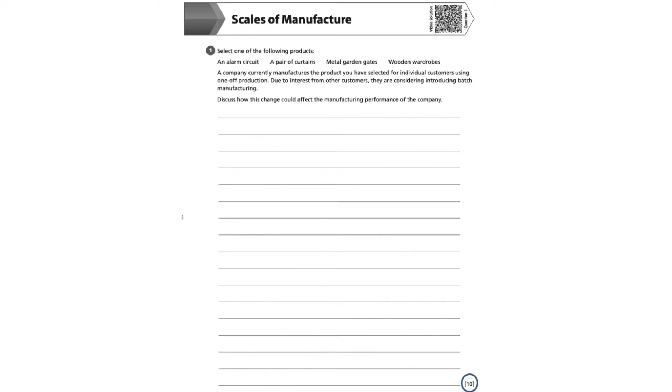We can see in the bottom right hand corner that this question is worth 10 marks in total. So it is definitely a question that we need to think about, as this is a substantial amount of marks. Let's start by considering the question in more detail. Firstly, we are asked to select one of the products. Now, it is really important here that you think about your specialist material area and that you choose the product that sits the best within this. Doing so will allow you to draw upon your subject-specific and technical knowledge.

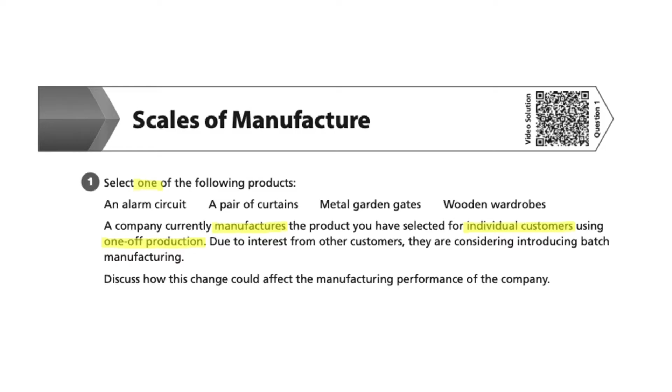The second keyword that I have highlighted is manufactures. Again, it is really important when we are answering this question that our focus is on the manufacturing processes rather than the design process. Individual customers is the next highlight that I have made. It is really important that we realise at the moment the company currently manufactures for individual customers, which is what we know is called one-off production. However, they are considering moving to the second highlighted word of batch manufacturing.

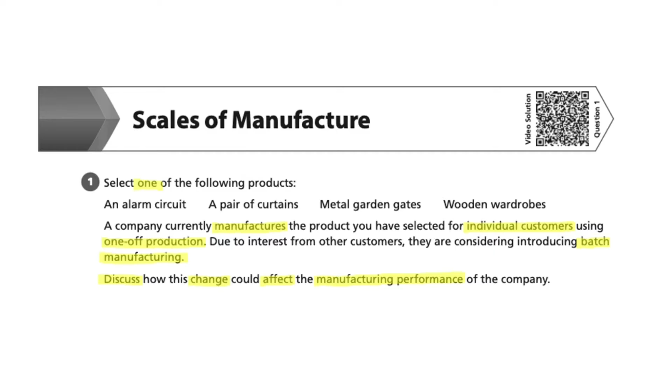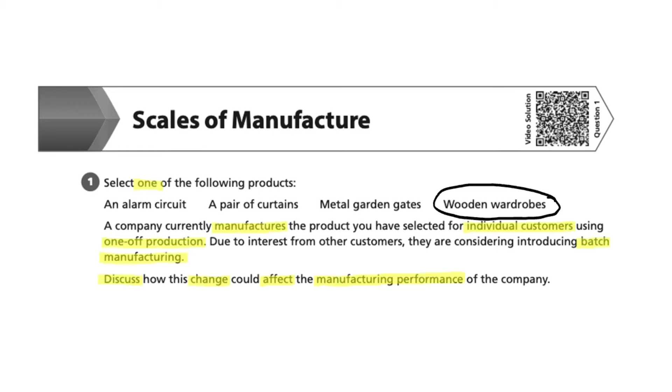Therefore, within this answer, you are asked to discuss the change from one-off to batch production, which will affect the manufacturing performance. Discuss is the command word here, which we must ensure our answer demonstrates. Discuss means that we should set out consideration to both sides, in this case, one-off production and batch manufacturing. For this example, I am going to choose wooden wardrobes as my product. However, the answer is very much the same regardless of the product in this question. This is because the question focuses on one-off and batch production rather than the making of the product itself.

To help me start planning my answer to this question, I'm going to jot down on the side of the paper some key words which I think I must mention within my answer. I know that changing the quantity of products can have a significant effect on many of the elements of manufacturing. For instance, materials. The materials used in one-off production are often of the best quality. However, in batch production, I may not be able to buy such a material in a large quantity. Therefore, I may have to change the material or components that I use for manufacturing. When I am making a larger quantity of a product, however, rather than just a one-off, this gives me the opportunity to bulk buy my materials and components, which will make the cost of the materials or components less per unit.

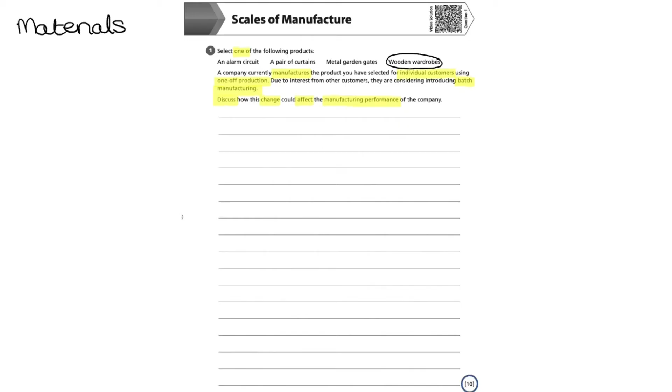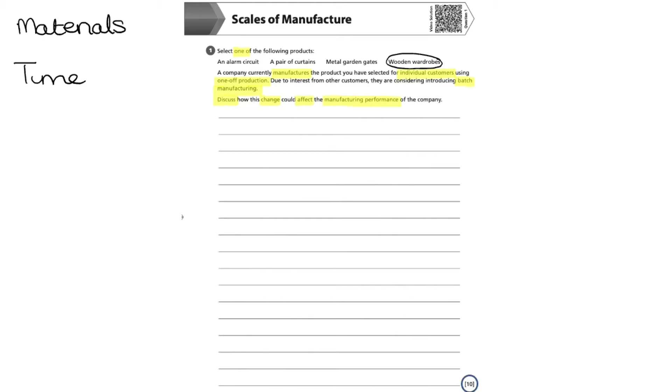The time it takes to make each product will also be decreased in batch production, as the processes of manufacturing are repetitive and the batch will be made in stages, meaning there is less time setting up tools and equipment. For example, all the hinges for the batch would be attached at the same time. This has a positive impact on the costing of each unit. Equally, as the workers will be able to repeat their tasks, they will become quicker and adopt a higher level of competence as they become more familiar with each task. Having said that, however, wages are often lower for workers within batch production, as they are repeating the same job, which means they have a lower skill set in general, which isn't as broad.

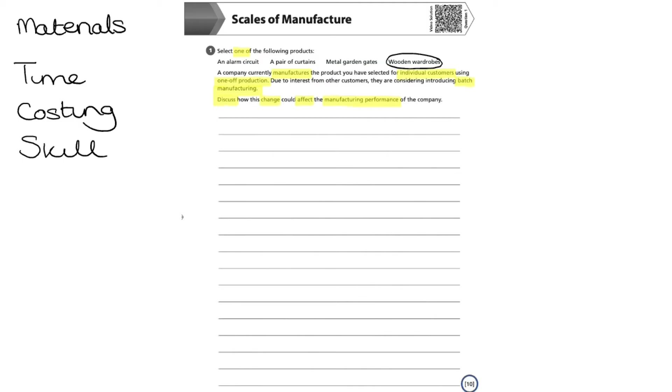One-off production often uses workers with a high level of skill to ensure that the individual product is of the very best quality. Experts in certain processes will be used, as each part of the manufacture needs to be right the very first time for this one-off product. There are no second chances. Mistakes can be costly, as it could mean that the manufacture of the entire product may need to begin again with one little mistake. Manufacturing in a one-off product is rarely automated, as the cost and setup of such equipment is so vast. It would increase the cost of the one-off product substantially. Whilst in batch production, the cost of setting up automated equipment can be shared between the number of units that are being manufactured.

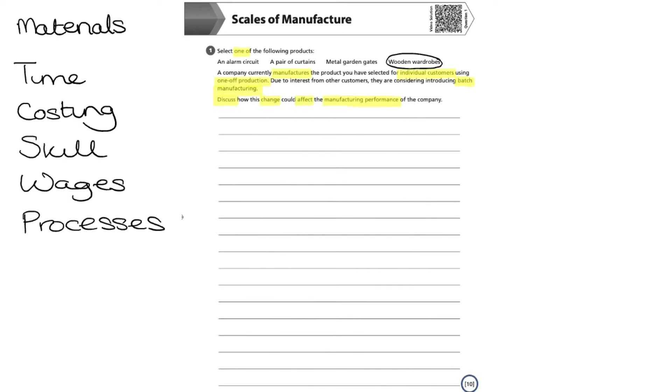Therefore, I have added processes to the list, as that is an important point to consider, as is automation. We could also discuss the differences between quality control. In one-off production, there are generally very high levels of quality control, and the product will be checked several times. In batch production, however, there are often only random checks on the products at certain points. Maybe it's every 1 in 10 products, or 1 in 50, 1 in 100, or maybe even 1 in 1,000, depending on the size of the batch. This assumes that all of the other products will be of the same quality due to the repetitive nature of the manufacturing process. This means that inspection costs are lower. However, in batch production, some products may slip through which are not of the quality one would expect.

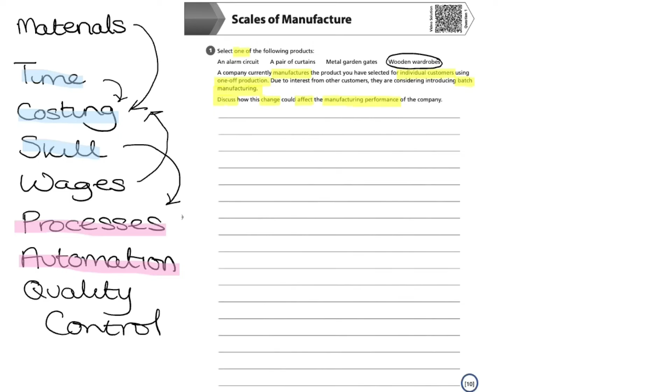Now that I have brainstormed the scales of manufacture, I can begin to link some of my notes together to help me in structuring my answer. I could do this in many ways. I could use colour coding, such as the blue here that links time, costing and skill, or the pink which links processes and automation. Or maybe I could use arrows to link different ideas together. Numbering is another method which is often used. I tend to begin writing my answer, however, and then use my brainstorm as a checklist to ensure that I have included the points that I wish to.

Here I am going to begin an introduction to introduce what batch manufacturing and one-off production actually are. Now that I have introduced batch manufacturing and one-off production, I'm going to start choosing one of the considerations I brainstormed within my notes. I think I will use costing to start with.

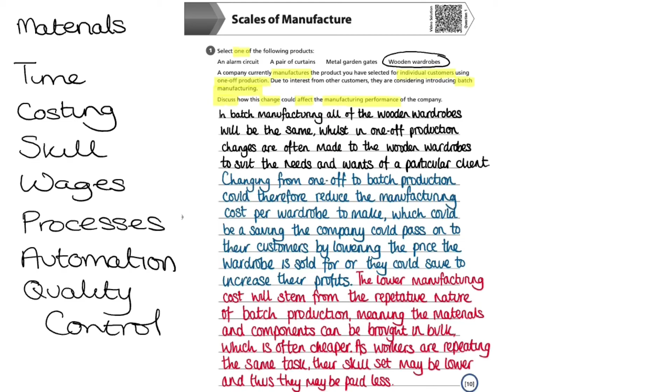As our command word is to discuss, I am making sure that when I write my answer, I am doing so by considering the effects of cost on both one-off production and batch manufacturing. This in turn links to materials and the skill set of the workers. As I have now got to the end of the space for our answer to be written in, I am going to read back through my answer. And as I do, I'm going to tick off where I think I may have achieved a mark.

In batch manufacturing, all of the wooden wardrobes will be the same, whilst in one-off production, changes are often made to the wooden wardrobes to suit the needs and wants of a particular client. Now, although I think that I have achieved a mark there for saying the difference between batch manufacturing and one-off production, I feel that I could have done some editing.

I feel that where it says in batch manufacturing at the beginning, I should have written also a specified number of identical products are made, meaning all of the wooden wardrobes will be the same. Whilst in one-off production, and here I think I should have inserted one product is made at a time for a specific customer. Changes are often made to the wooden wardrobes to suit the needs and wants of a particular client. That to me is a much better introduction.

So don't be afraid to edit as I have done, but just make sure that it is very clear to the examiner anything that you add. So here I've used a little star to mark that, and then I've also tagged the second bit onto the second line. The addition of this detail and clarification would have helped me to gain a second mark here.

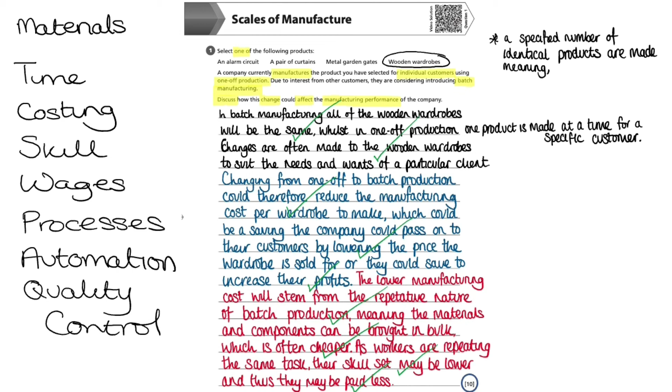So at the moment, we can see that our answer probably only has 9 marks. However, we really need to achieve 10. So we're not going to just leave this answer. Instead, we're going to look down our brainstorm, which we did earlier, and see if we can draw out another point or so to ensure that we do achieve full marks for this question.

When we go through our brainstorm from earlier, we can see that we haven't really talked yet about the time difference between one-off production and batch manufacturing, automation and quality control. So I think that is what I will add on to my next part of the answer. There is often additional paper on an exam for you to add to your answers for the longer questions. However, if not, I am sure you will be able to find some space to add what you need to write. Again, just make sure it is very clear for the examiner to see.

So I've now added on, dedicated jigs and automation may be invested in for batch production. That's the next mark that I needed, but I'm going to expand on it further just to make sure that I do get the 10 full marks. I then go on to say the cost can equally be divided per wardrobe that will be made within the batch. Another mark. The use of jigs and automation should speed up the time of manufacture for each wardrobe, meaning more can be made than in a one-off.

The addition of this information has definitely ensured that we have given enough information within our answer to achieve the 10 marks available for this question. Your answer may have included other points also. For example, I could have chosen to expand my answer by writing about quality control, which would have led on well from my discussions about the workers, processes or automation.

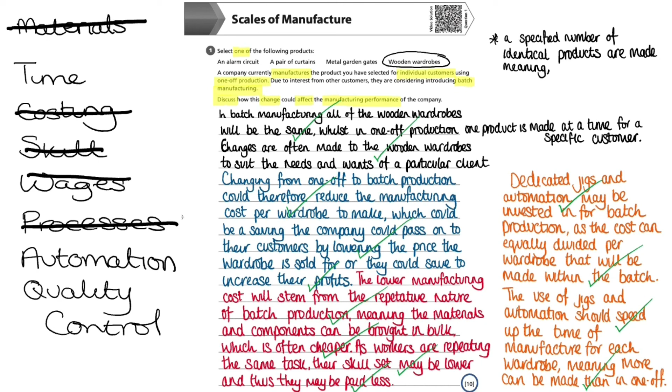It's really important that you have made enough relevant points to access the full amount of marks available. So, if there are 10 marks for the question like there is on this one, you should at least include 10 points which ensure you consider both one-off production and batch manufacturing.